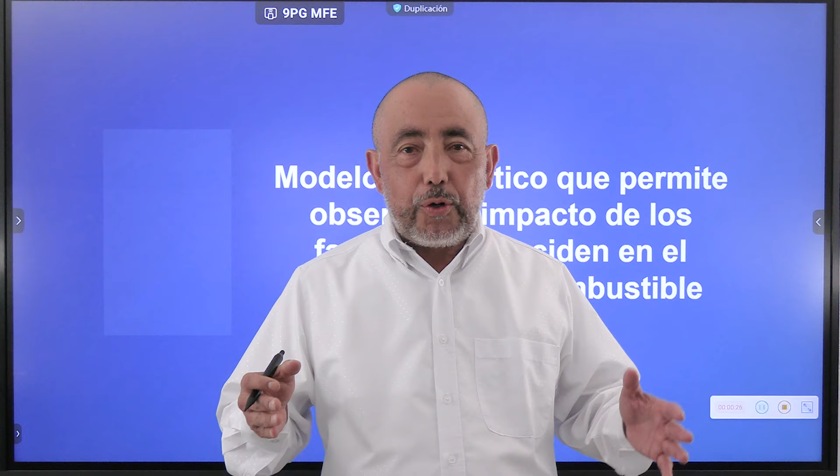This time, we will be focusing on the area of statistical science to improve the competitiveness of freight transport. We will refer to the statistical model that allows us to observe the impact of the factors affecting fuel efficiency. It is evident that freight transportation is one of the key links in the supply chain.

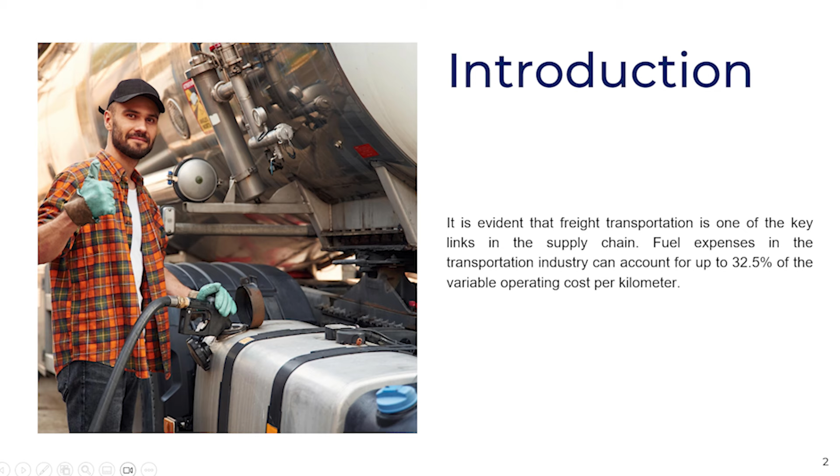Fuel expenses in the freight transport industry can sometimes reach up to 32.5% of the variable cost of any transport company. The theoretical model we present in this session, regardless of many others we will show you, is precisely the one that supports the application of the statistical method to model and subsequently forecast the behavior of an effect of interest, which is what we are looking for and call fuel efficiency.

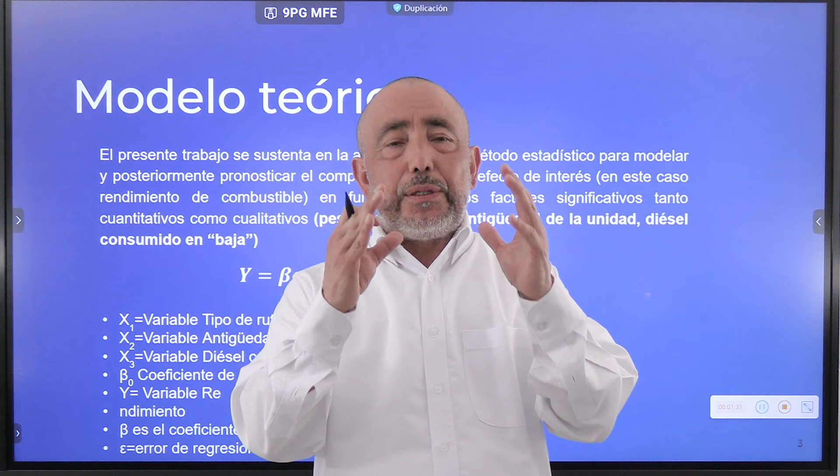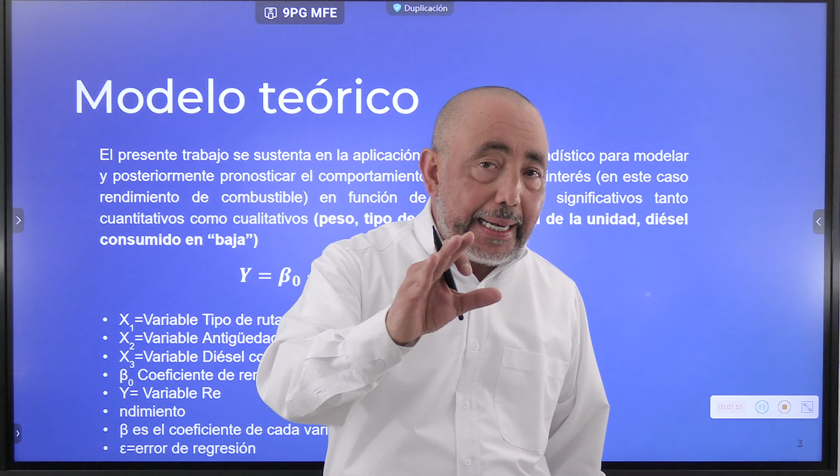Based on this, several factors, of course, affect the performance you expect. What are the possible factors I am referring to? The weight of the vehicle, for example, the route type, idle speed, whether the driver is driving at an appropriate speed or not, etc. Many variables affect fuel efficiency in a vehicle. To this end, this theoretical statistical formula was created to model the behavior of the unit's fuel efficiency.

We will call Y the fuel efficiency of the unit. We will call beta the coefficient of each variable affecting the fuel efficiency of the unit. We will then call X the variable that influences its performance.

Therefore, the fuel efficiency of the unit will depend on the fuel efficiency variable itself, plus the variable multiplied by its coefficient, plus the variable affecting the performance or coefficient of the second variable, and so on. Thus, you could have 10 variables and possibly 10 sub-indices that affect it. We will also have the error we are referring to.

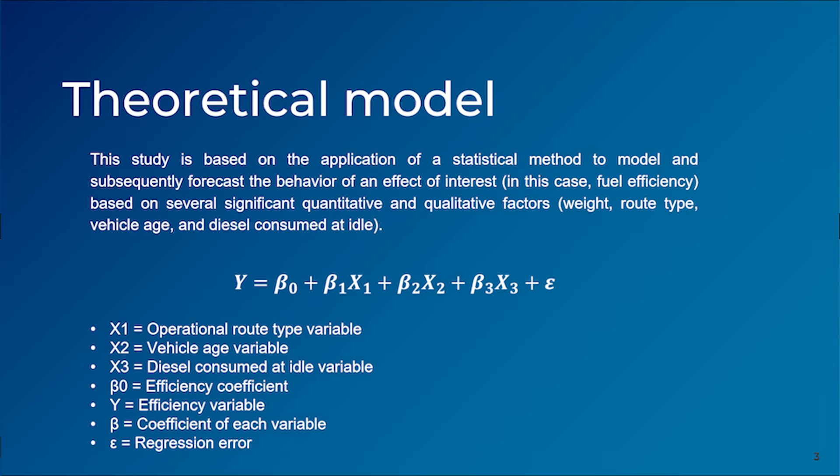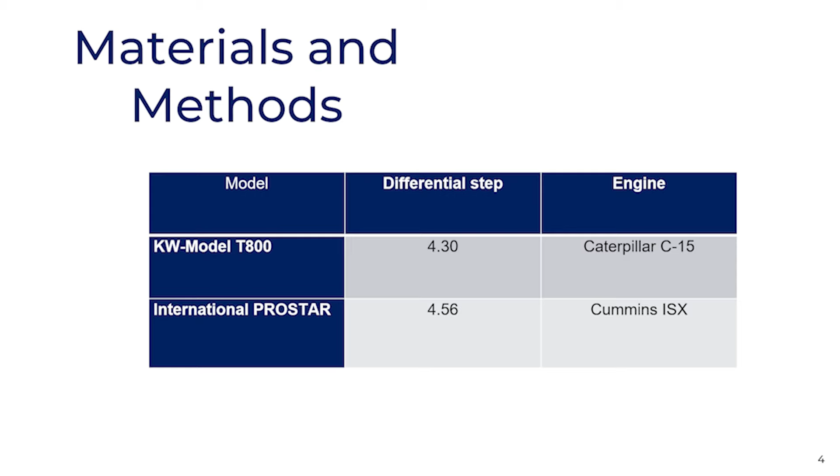The model we used for this occasion was based on data from a company that allows us to take consecutive data from different types of units, engine types, and routes. For example, we use T800 engines and ProStar engines with differential steps of 4.30 and 4.56, and of course, different engine types.

The goal was not to compare whether one engine gives better or worse performance, but rather how the operation influences its performance. Regardless of the age of the unit, for example, our variables for this analysis were route type, vehicle age, and the liters of diesel consumed at idle speed, at low speed.

Therefore, there are always discrete and continuous variables in any statistical method or a calculation carried out through different models. We will always call discrete variables those that are counts or enumerations, which can only be recorded with whole numbers. Continuous variables refer to different measures of continuous range of numerical values.

Also recorded numerically, the route type will be a discrete variable with two measurements: 0 for kilometers between the origin and destination without slopes or curves, and 1 for kilometers with slopes or curves.

The age variable is highly significant in the Mexican fleet. Statistically, it is stated that the average age of the Mexican fleet is over 18 years. Therefore, it is important to always consider it when analyzing performance. Here, we will call it a continuous variable, and of course, the years of service imply a lower fuel efficiency for the unit.

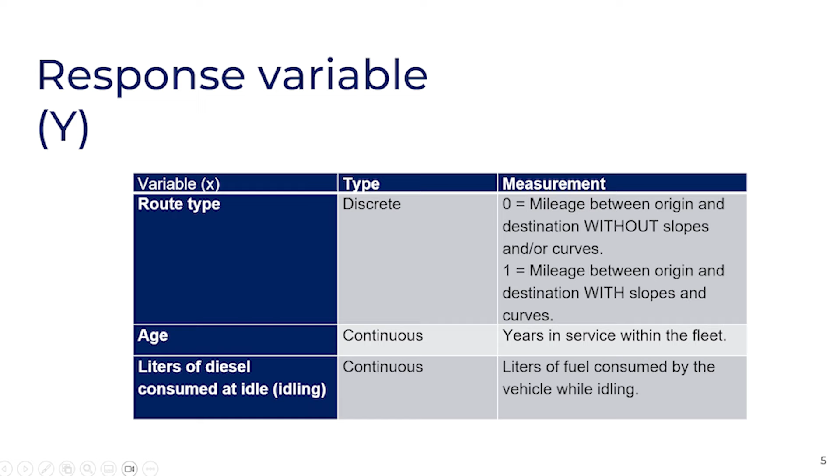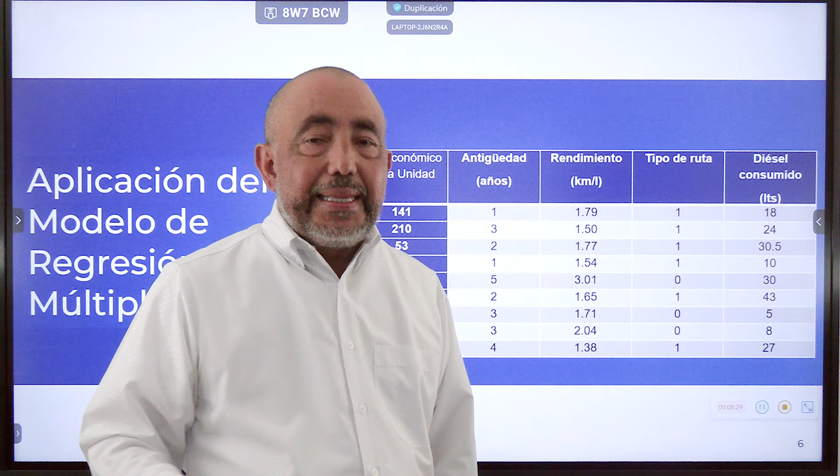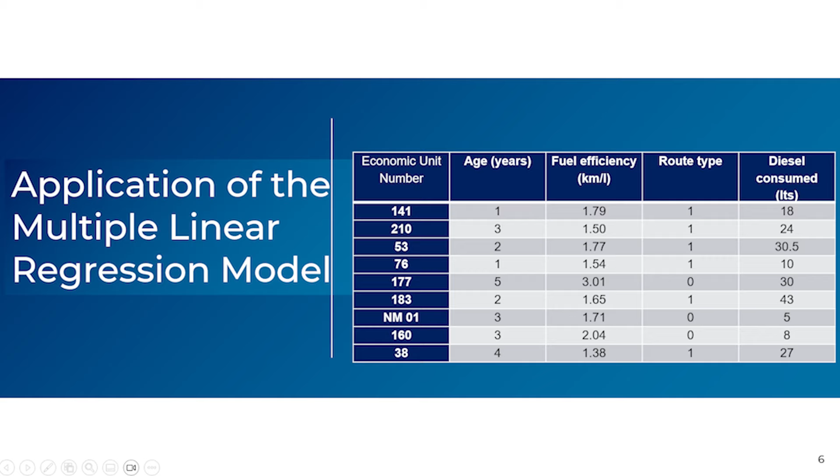Here, we can see the unit 141, which is 1 year old, had a fuel efficiency of 1.79 in route type 1 and consumed 18 liters of fuel at idle. Of course, fuel efficiency is influenced by many variables, which is why a unit with 1 year of age can have a fuel efficiency of 1.79, while a unit with 5 years of age can have a fuel efficiency of 3.01. If we want to view this graphically, the presentation will look like this.

The model, under optimal levels for the variables stated, indicates that the maximum fuel efficiency is 2.093, and the regression equation shows that this performance is achieved under conditions previously stated. We must emphasize that the regression equation indicates that under certain conditions and variables, the maximum performance for a new unit is 2.093.

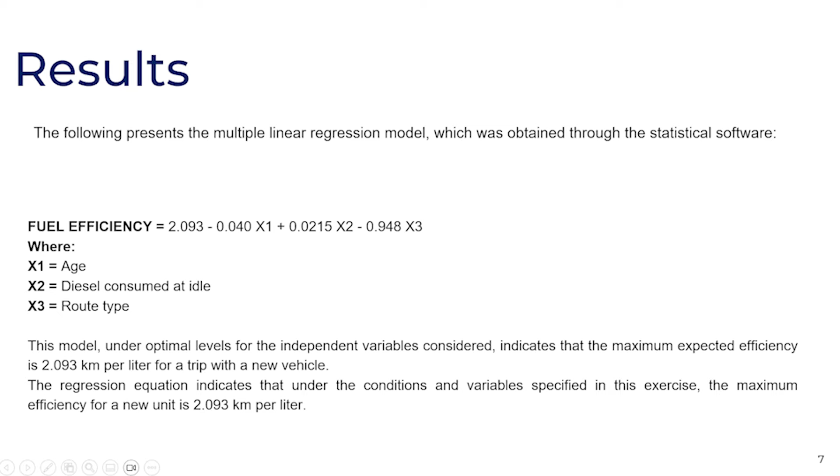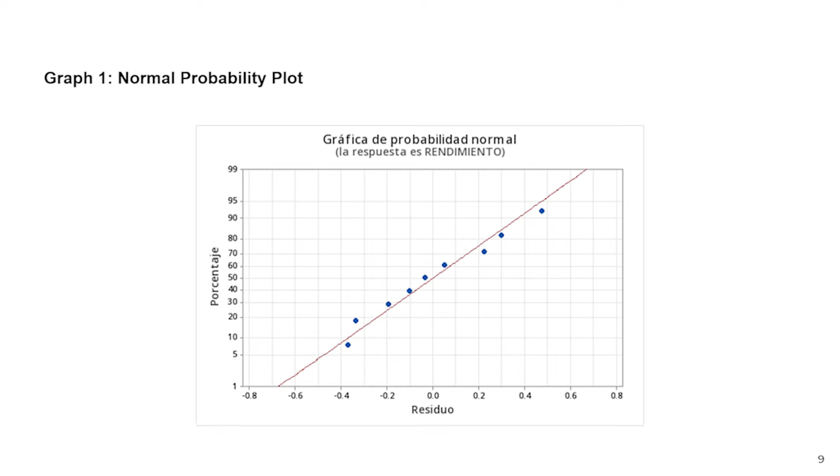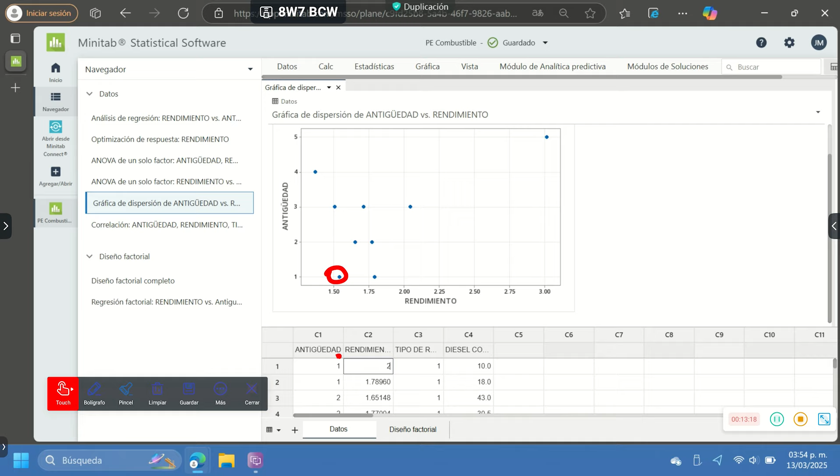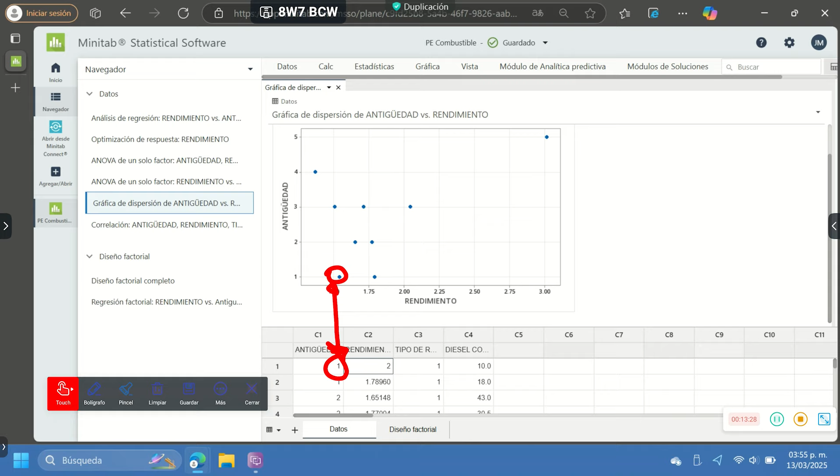A clearer example, using a simpler graph, could be the following. We can observe that Unit 10 has a performance of 1.5, but it has an age of only 1 year. So, the question of whether age affects the fuel efficiency of the unit is answered by saying yes, but not completely. You could compare it with Unit 5, which had a performance of 3. Probably, age does affect fuel efficiency, but the way the driver operates the unit is more significant.

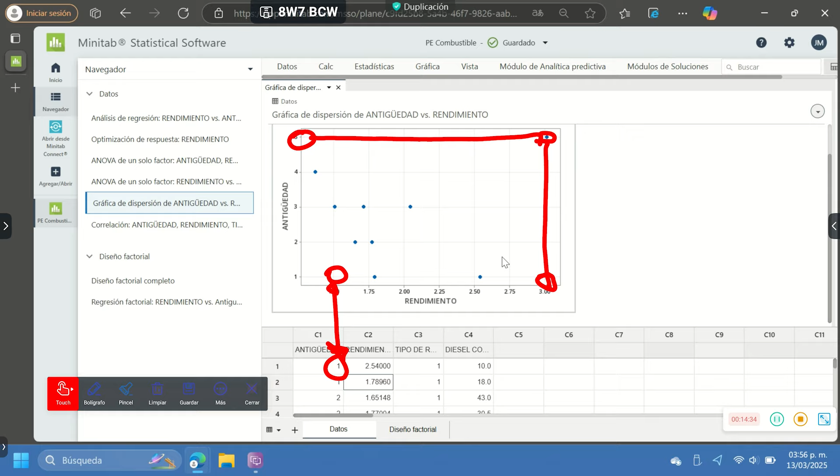Of course, we are not considering whether the vehicle was driven at high speed or not, but we are pointing out how these variables can significantly affect fuel efficiency. In terms of correlation, you can see how age can indeed generate a positive impact on fuel efficiency, just as the unit's performance can be affected by the route type, along with many other variables that influence the operation of the vehicle while the driver is driving.

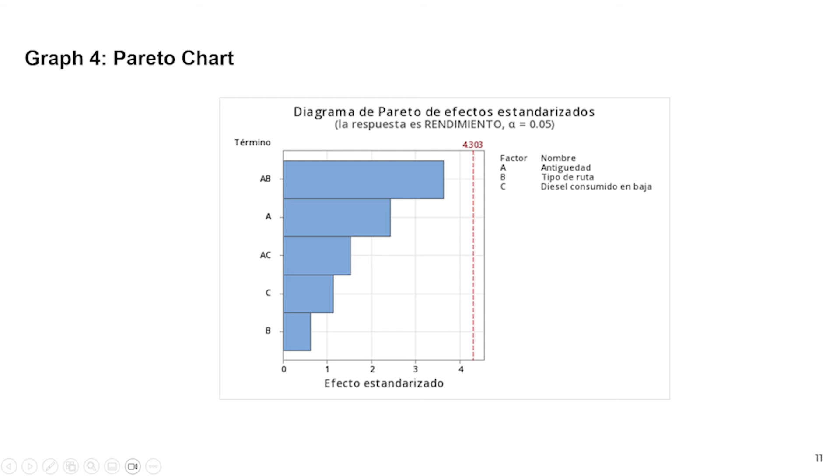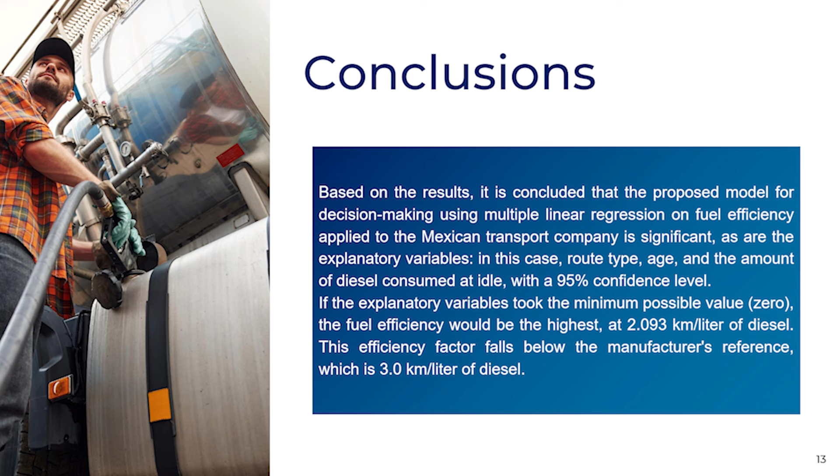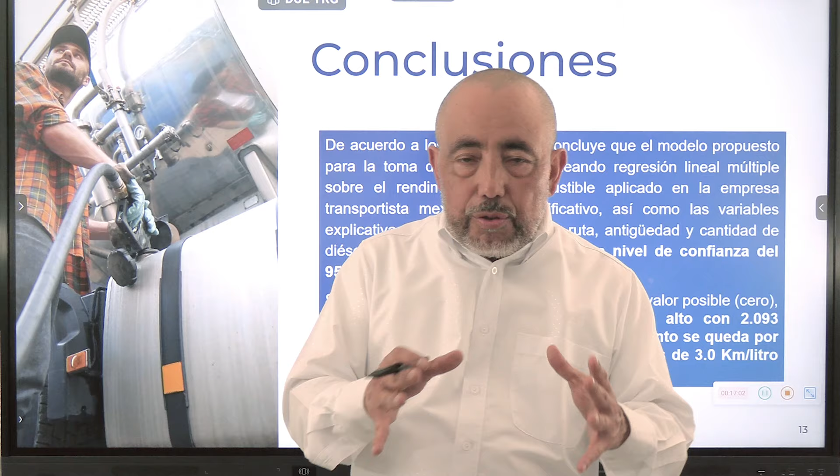Finally, the conclusions based on this proposed model for decision-making using multiple linear regression on fuel efficiency applied to a transport company are highly significant, as are the explanatory variables such as route type, unit age, diesel consumed at idle, etc. The variables explain that when the minimum value, 0, is present, fuel efficiency will be at its highest, which in this case is 2.093 km per liter.

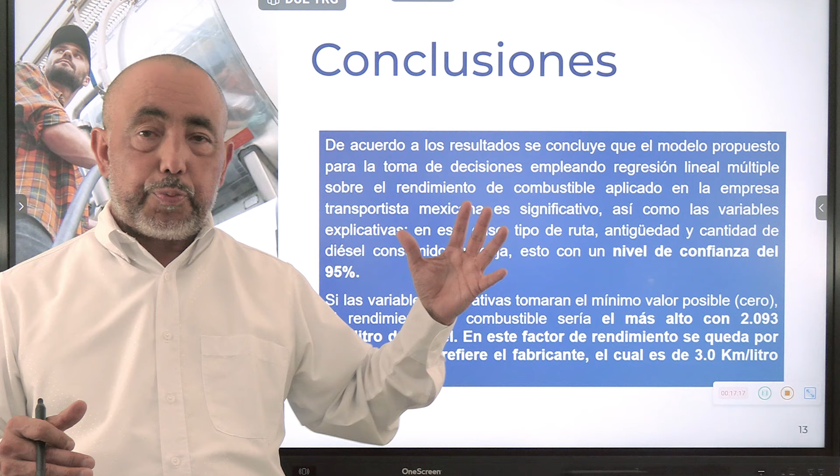This performance factor is much lower than was expected for a new unit, which was 3. Therefore, the company has a lot of work ahead, not only on the 3 variables present in this exercise, but on many more that represent the possibilities to improve fuel cost competitiveness.